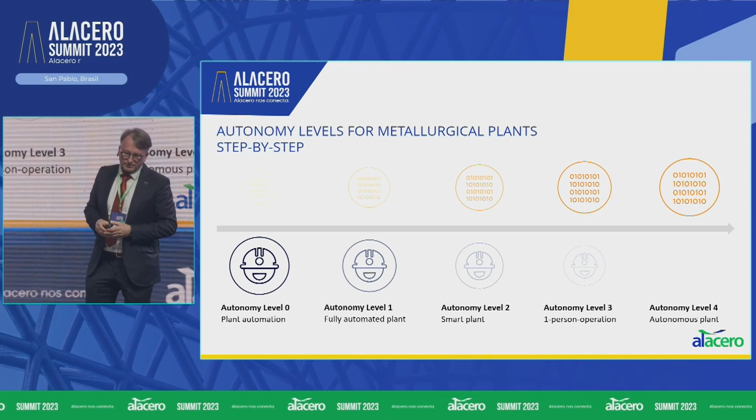That needs a lot of different technologies applied and different support systems. The central system, I will just show this one due to time restrictions, is a central operation cockpit we have developed. The idea here is not to present all the information to the operator, but to only present the information that is relevant to make the right decision, to prepare decisions that are just confirmed by the operator based on the data we get out of the plant,

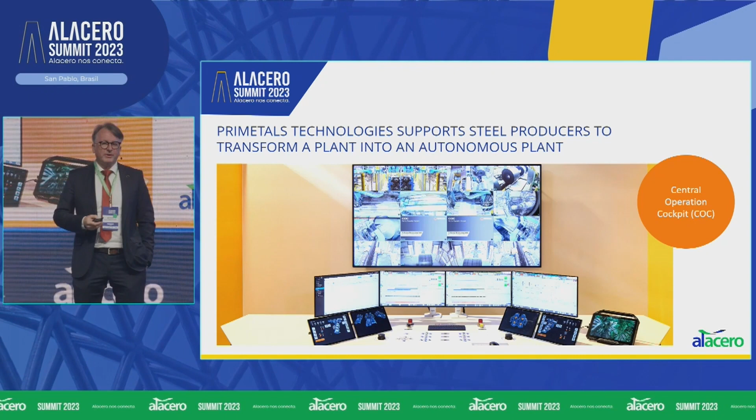and have a standard operation running actually without interference of the operator, and in specific cases where it is necessary, the operator gets the full support, gets all the relevant information, gets proposals what to do next. And with the support systems, one person can operate an entire plant. That is one aspect, plant autonomy and how we support people in making better decisions, making a better job.

The second one, CO2 reduction. Decarbonization: the ones who have been here last year maybe remember what my colleague Alexandre was talking about. We see that decarbonization will happen in 3 phases. In the first phase, it is more or less optimization of the existing assets and technologies. A transition phase, using partially hydrogen, using new technologies to reduce carbon with a potential of 30 to 40%. And then finally, green steel, maybe starting in 2030: hydrogen-based DRI plants, renewable energy, and carbon capture technologies will allow that.

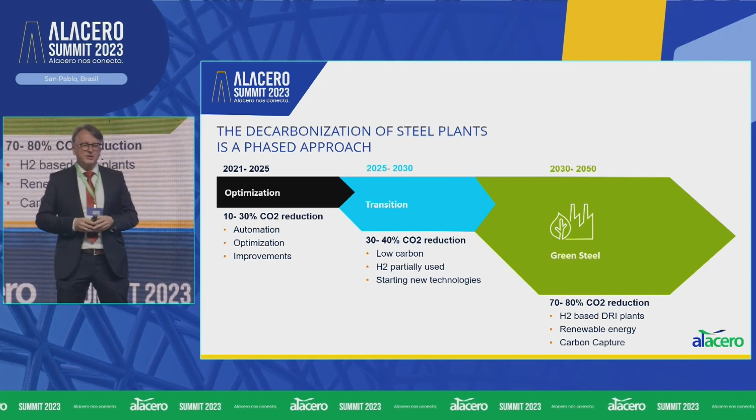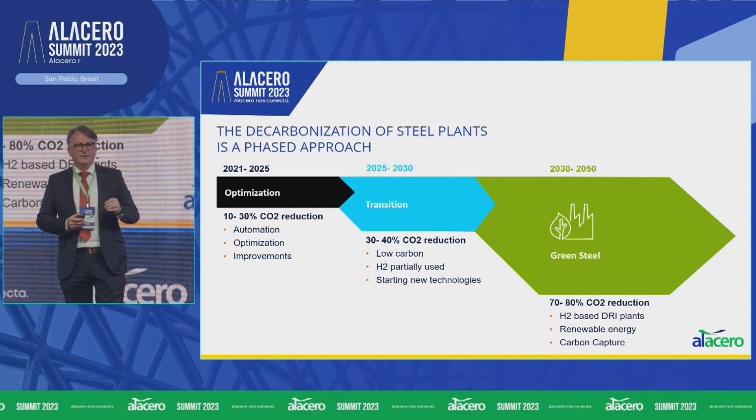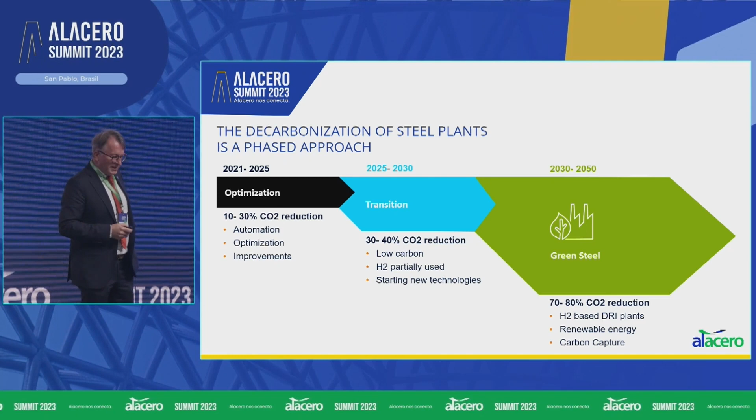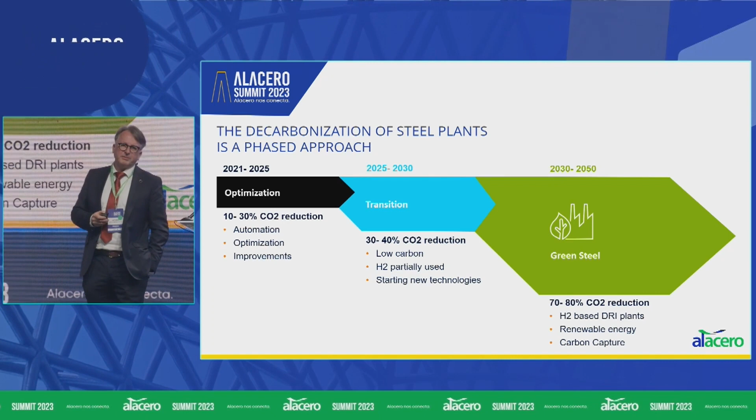I will only refer to the first phase and what automation and digital systems can do there, because I assume that in phase 2 and 3, the plants will be fully digitized anyhow. Automation and digitalization can support in many areas, and the beauty is that there is no large investment involved. Compared to installing a new technology, installing an optimization system is a rather low investment, and usually it's not only about CO2 reduction, there are additional benefits out of those systems that ensure a very short return on investment time. So where are the anchor points? Where can digitalization, where can automation support here?

One of the main factors I see is on the output side, increase the yield. Whatever you cut off and scrap in steel production, in the entire production chain, goes back to the beginning and needs to be remelted. All CO2 that is related to these pieces is wasted CO2. So increasing the yield automatically reduces the rate of carbon dioxide that is related to the sold and used product. That's a huge lever. On the input side, if it is acceptable by the process, we can maximize the use of friendly raw materials, which always needs automation support, process models that pre-calculate whether this is possible or not.

Minimize energy demand. It is very often very simple. When we talk about process, we always have in mind the blast furnace, the converter, the electric arc furnace. Very rarely we talk about water treatment plants. I still have it in my ears, my mom used to say, please turn off the lights when you leave the room. So when you go back to your plants, check if the cooling water pumps are turned off when they are not needed. It is so simple, and with minimum investment in turning the pumps off automatically when they are not needed, you can save a lot of energy, and energy always is related to CO2.

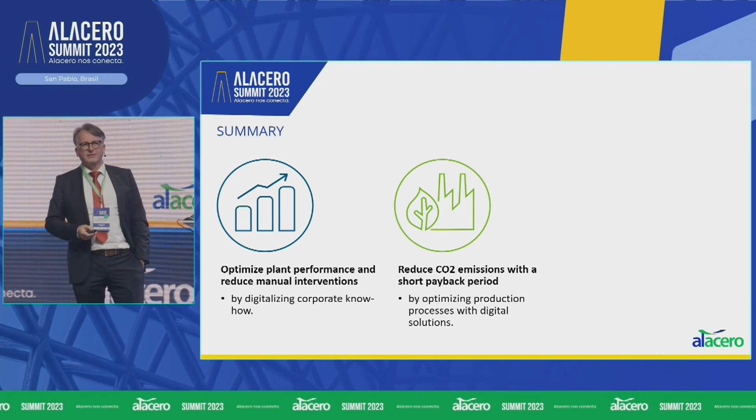To summarize, the digital solutions and the automation can support in optimizing plant performance and reduce manual interventions and increase the autonomy by combining data and information with digitized know-how that you can continuously grow. For CO2 emission reduction, the nice thing about the automation solutions is whatever you do, it pays back in a very short period of time, and it is not coming with a huge investment.

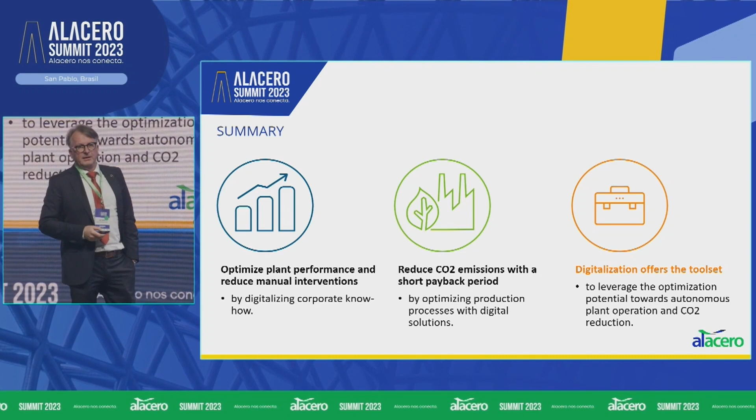Last not least, all the digital technologies that are available are just a tool set, and they only bring a benefit if they are applied properly, not only in the area of autonomous plant operation and CO2 reduction. Thank you very much. Thank you, Kurt.

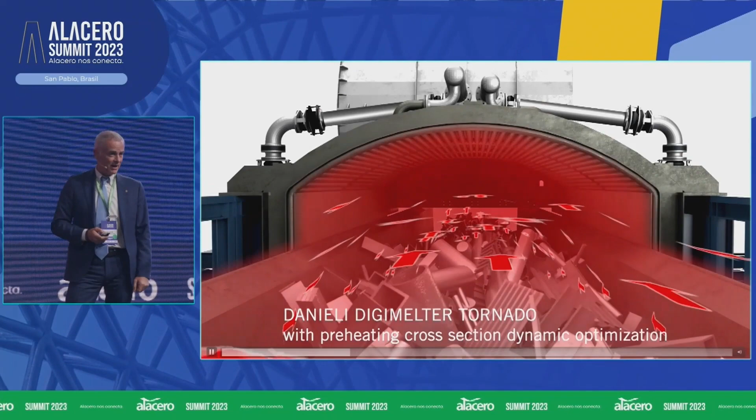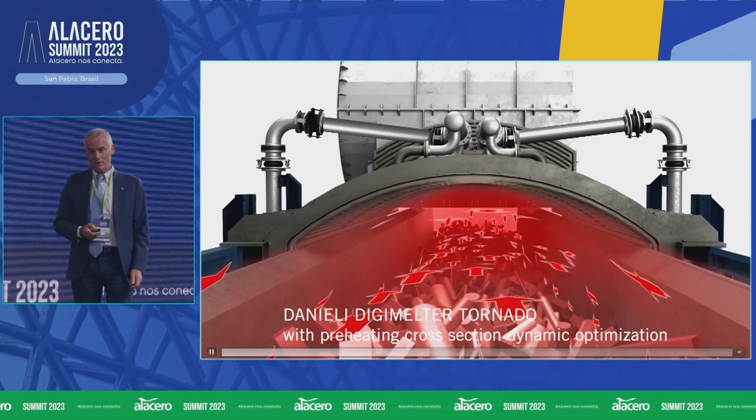Okay, this is the DANIELI Digimelter. Everybody knows what an electrical arc furnace is. This is the old solution, this is the new solution. What is new here is digital, so it's not analog anymore, it's digital. The electrodes are managed by the Q-ONE. I think more or less everybody knows about what Q-ONE is today, but it's a way to manage the arc from the electrodes in a digital manner. In some ways, it's like running a motor with frequency variation, let's say, for the speed.

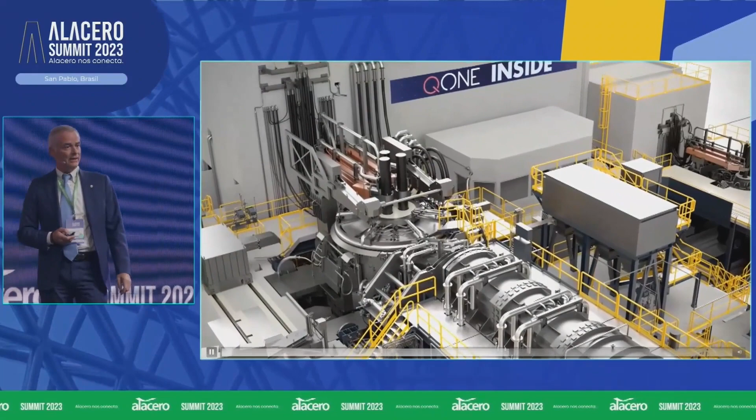This technology, we started to work on this around 2015. We did it in a plant close by our company, and we made this experiment. It was an experiment, we worked a couple of years on this small furnace. It was a very small furnace. Then we took it one step forward.

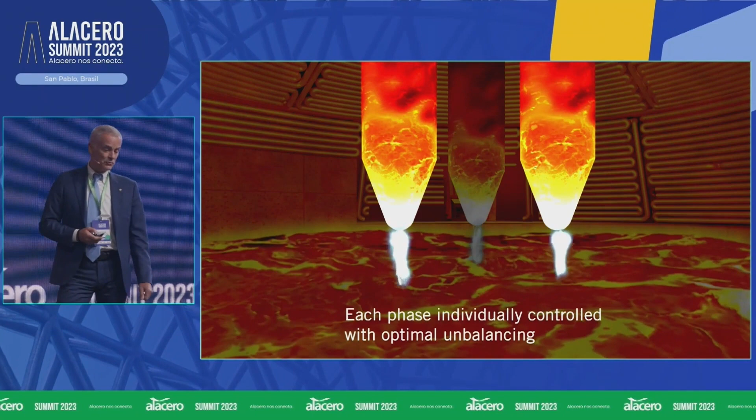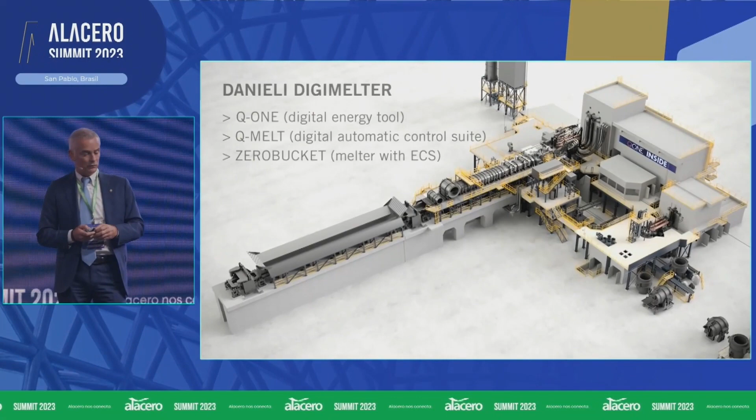Then in 2019, I was in Leoben, at another meeting similar to this one, and I was informing the people that 4 months later, we would have the first real plant in Sisak, Croatia, fed by the Q-ONE. This plant is a DANIELI plant, part of the group. We are producing steel there. And so in 2019, 2020 springtime, we had the first Q-ONE, the real one, in operation.

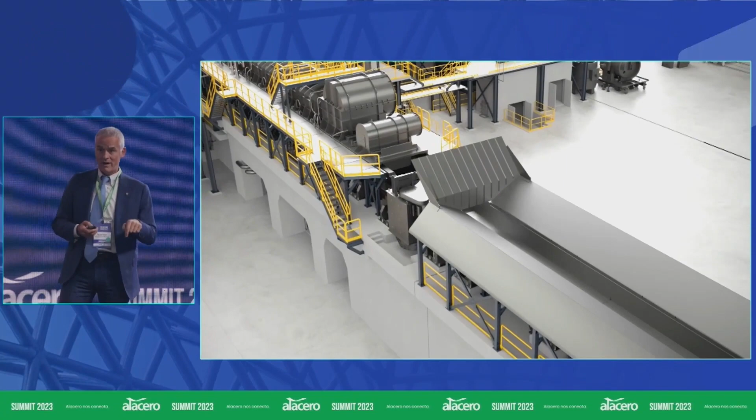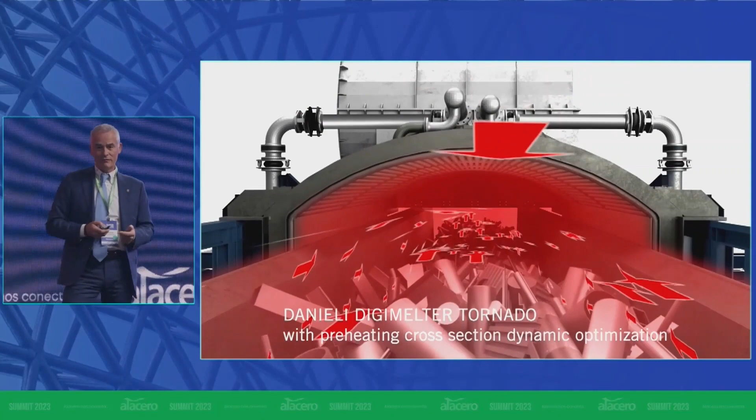Today we have 44 projects running. Running does not mean they are all in operation, but there are 8 in operation, and the rest is under design, under manufacturing, and so on. So in 4 years, we practically populated all the world, more or less, in different places, with this new solution.

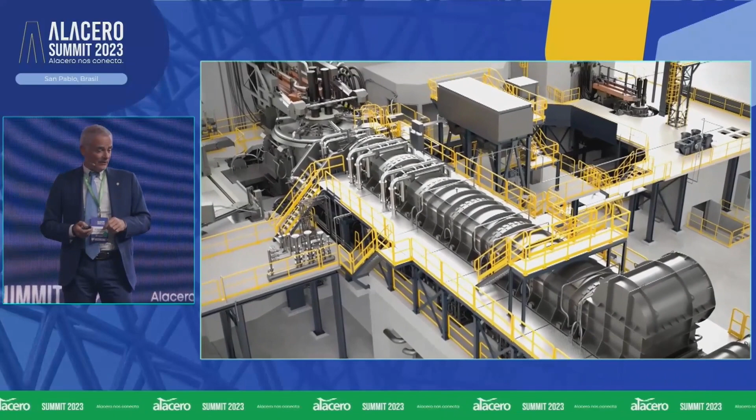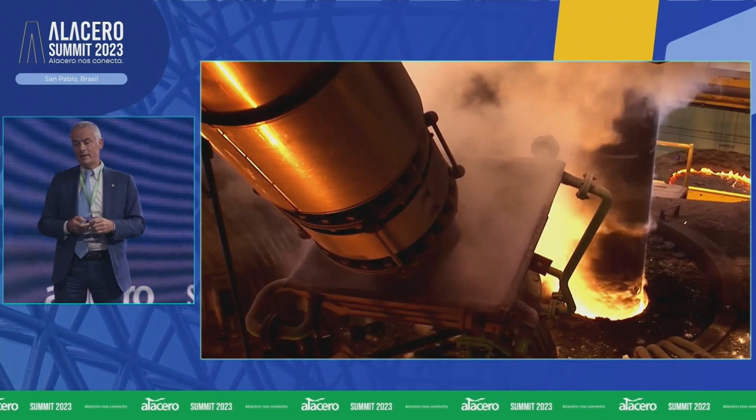Okay, the next point is the Energiron. Energiron is a process developed together with Tenova. It is a direct reduction plant. It is potentially the alternative to the blast furnace, BF-BOF solution. We are in the mainstream, let's say. We are producing steel using iron ore, and this solution has the benefit of reducing dramatically the emissions. This solution is also ready to switch to hydrogen instead of gas. Today it's with natural gas, the direct reduction is done with natural gas, but it can be used, we can also use hydrogen.

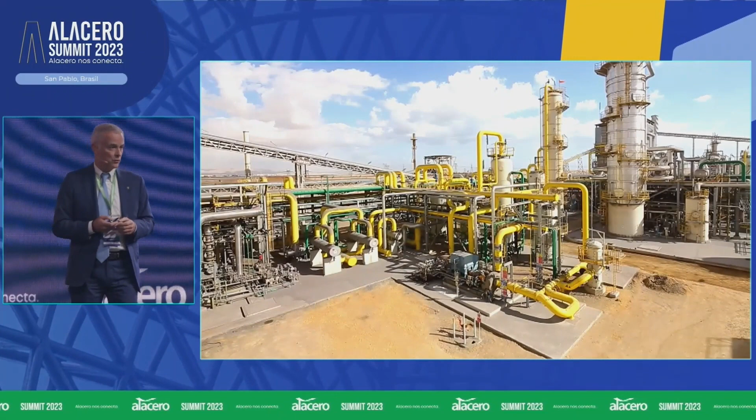There are already plants that are starting to think to use hydrogen. One is SSAB in Sweden, the name of the prototype is HYBRIT. There is another company there thinking to go in the same direction in Sweden. Why Sweden? Because Sweden has green electrical energy at low cost, and that is very important for this product, as it uses a lot of energy to produce hydrogen. So that solution is coming, let me put it this way.

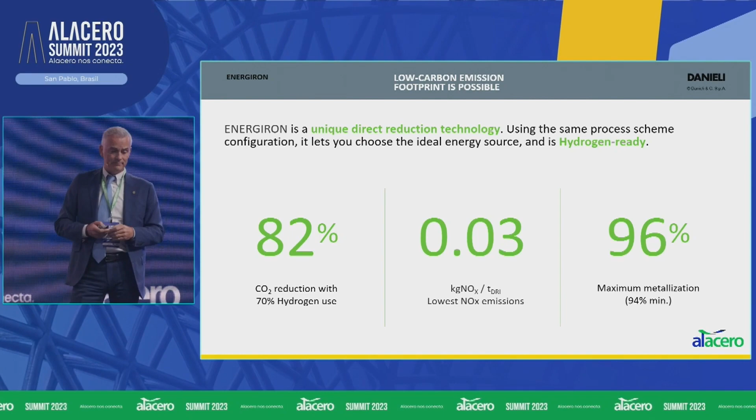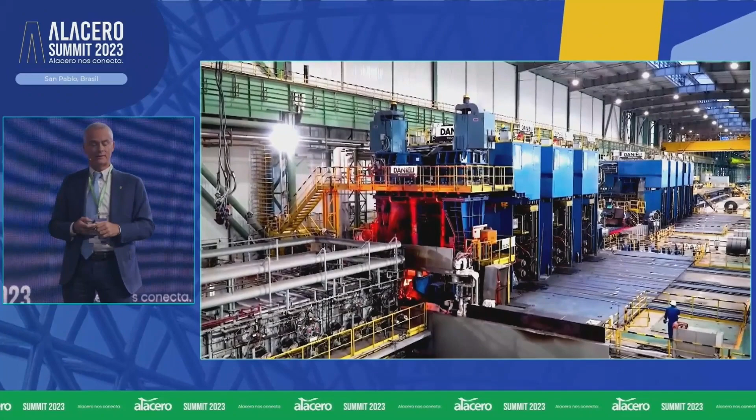Another technology we develop is the Danieli Universal Endless. Here we are in flat product, in the production of strip product. The first plant we developed with this technology is in China, Shougang Jingtang. This was 2019. Now we have another 4 plants under manufacturing and going to be supplied.

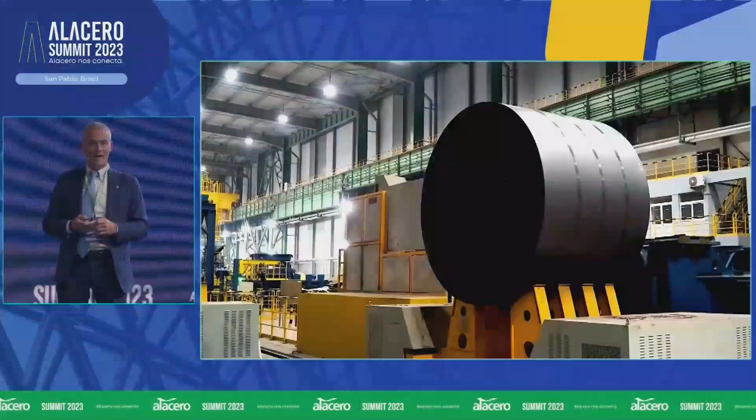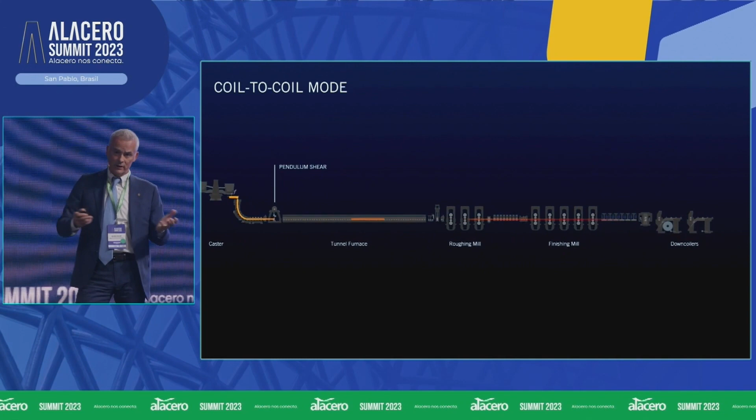The advantage of this solution is that we are able to be very flexible with this technology. For example, if you want to produce from 0.8 millimeters thickness to 25, this equipment is able to do it, while normally you need 2 mills. Why is it able? Because it's able to go coil-to-coil, semi-endless, or endless. This is the plus of the technology.

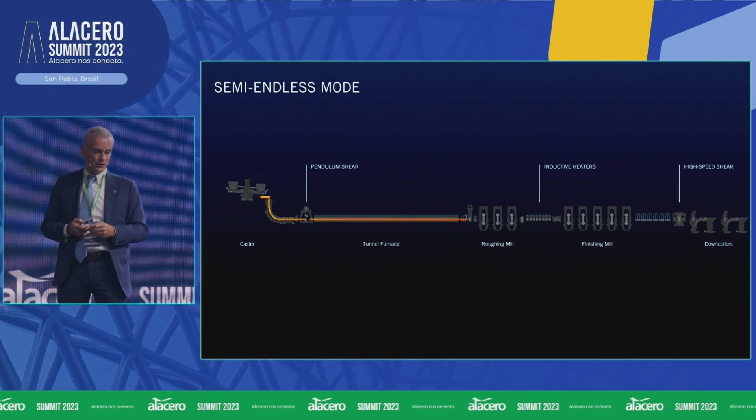The other point is that the casting is performing very well. So we are able to do up to 4 million tons per year of production, of output, while normally to do that you need 2 plants.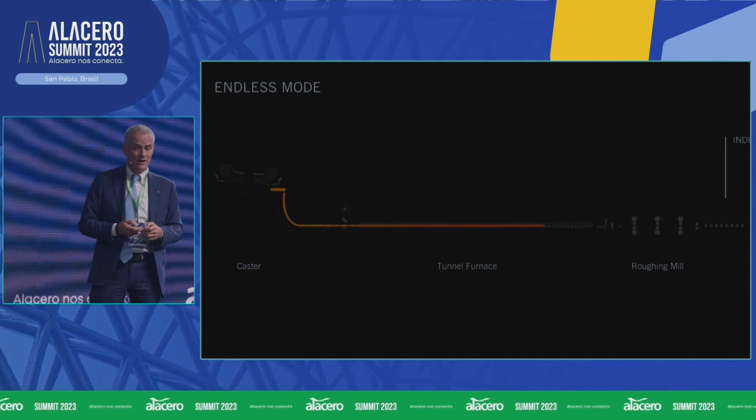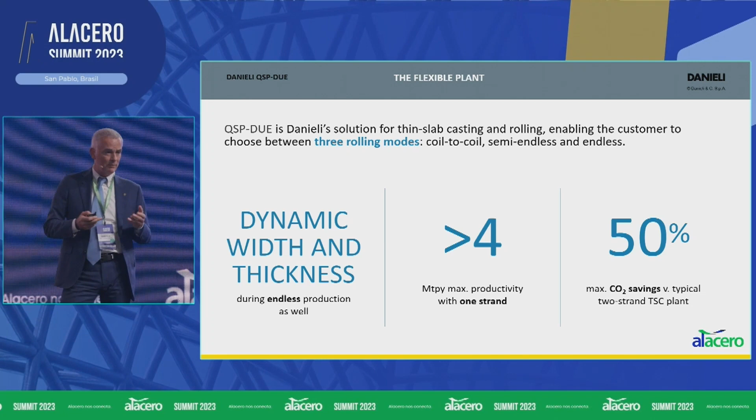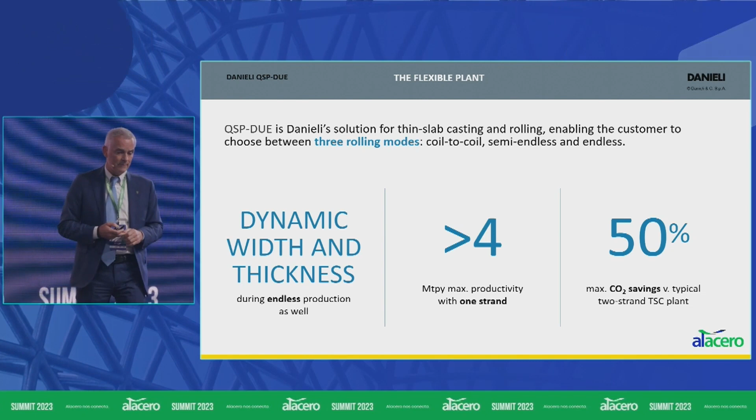What else? We can maybe see the summarizing table. Dynamic width and thickness adjustment, that is possible without stopping because we are endless, so we need to be able to do that to change production and so on. As I said, more than 4 million tons per year with one strand, with one plant. The saving of CO2 is about 50%, also considering that in some cases, for some product, for some application, we can avoid using the cold mill after this mill.

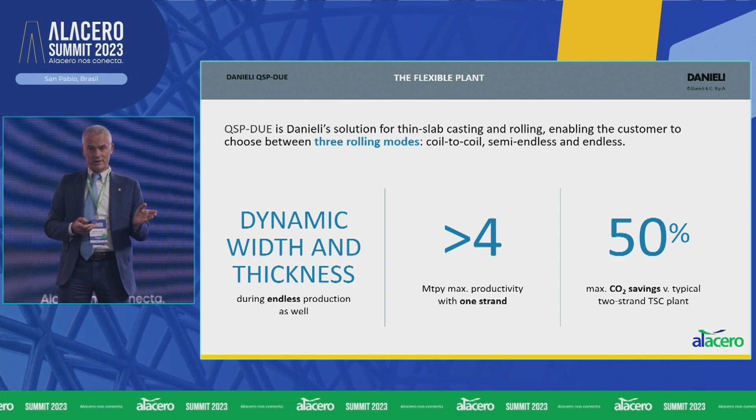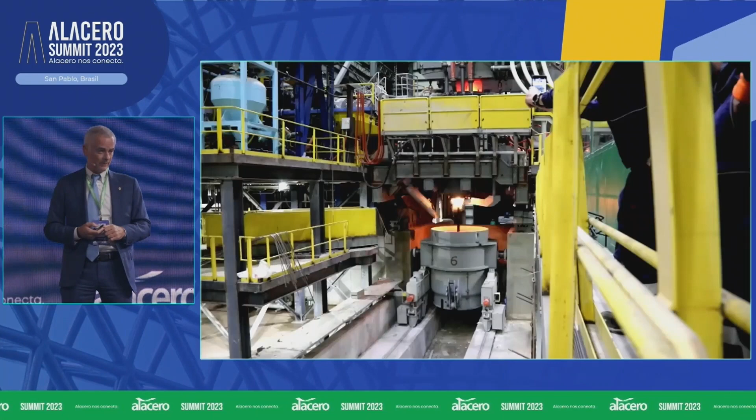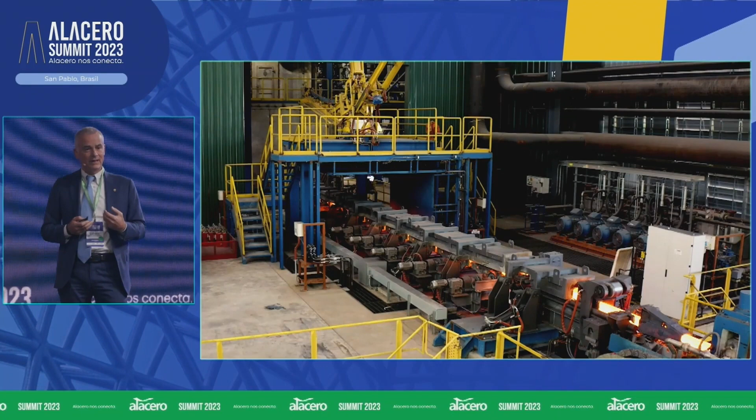We are always talking, as you see in all the presentations, about CO2 because, okay, in Europe, starting from Europe, everybody is thinking that we need to reduce CO2, so we are working on that. Reduction of CO2, anyhow, is for Danieli something that came free, let's say, because we started to think long time ago that we need to reduce the OPEX for the customer. Because the customer needs to be competitive, so maybe he will gain money and come back to buy the second mill or the second plant. So the reduction of OPEX is giving benefit to the customer, but also to the environment, because less resources means you are burning less material, handling less things, and so on.

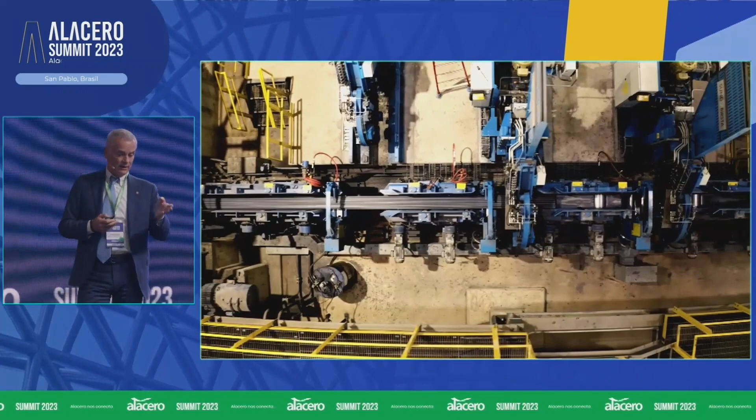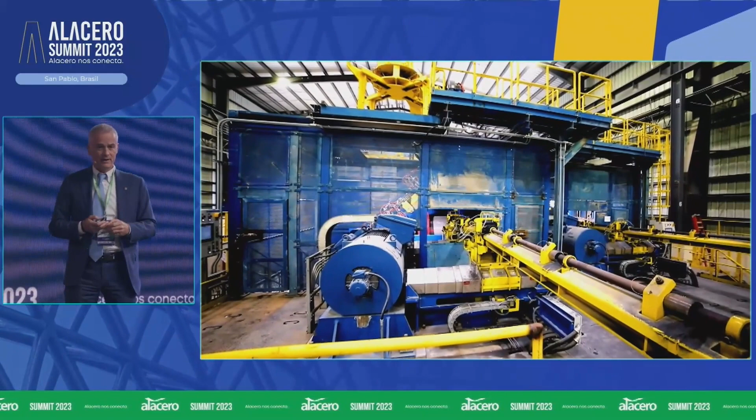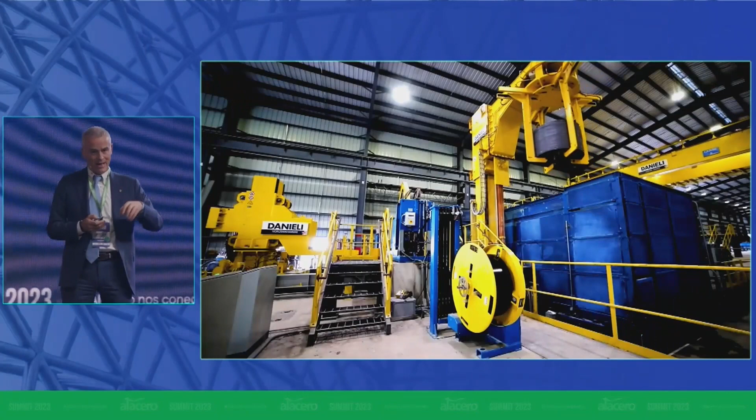This that you see on the screen is the MIDA, the mini mill Danieli for long product. Here is another story of success, sorry for repeating myself. 2008, we did the first plant in United States, CMC, Commercial Metals Company in the US. It was a challenge between the owner and our owner. At that time, they said, we need to make a small mill able to fulfill the production, the local production, collecting the scrap in the area and delivering final product in the area. The cost should be as minimum as possible, and the OPEX should be as low as possible.

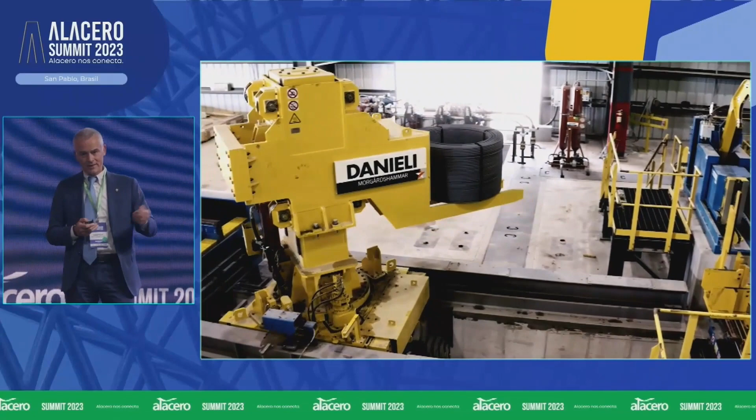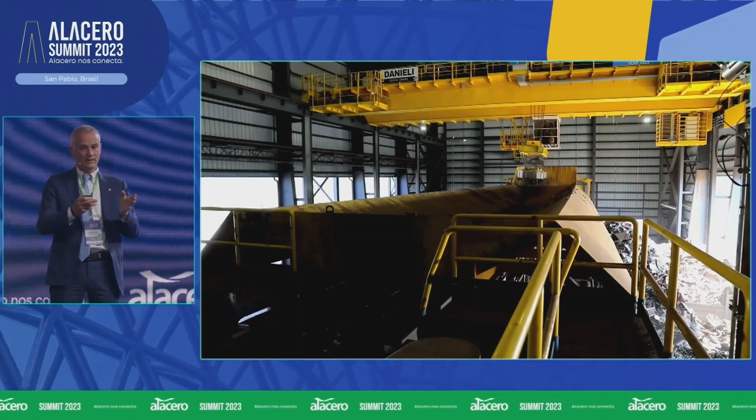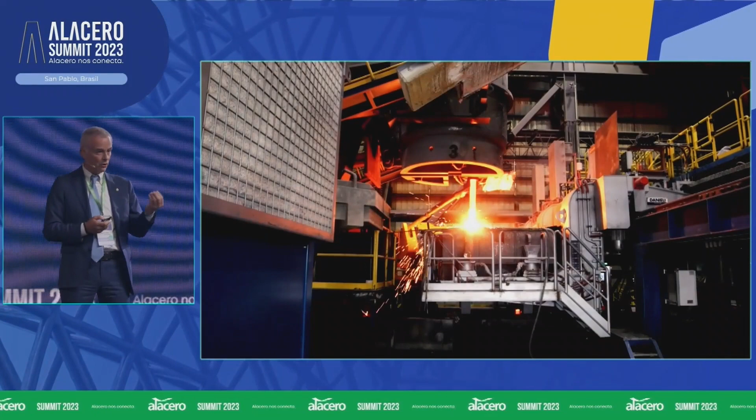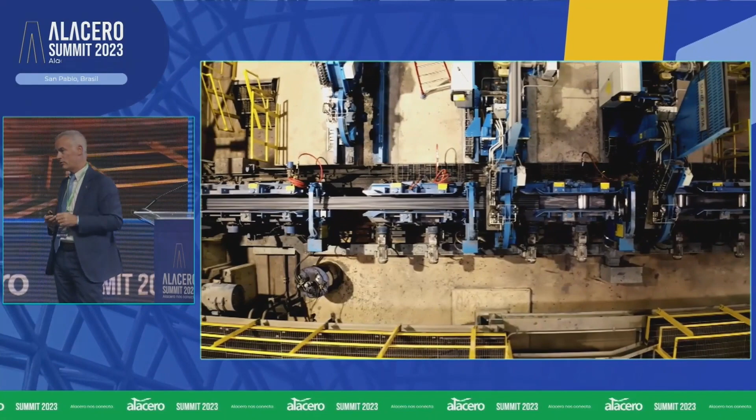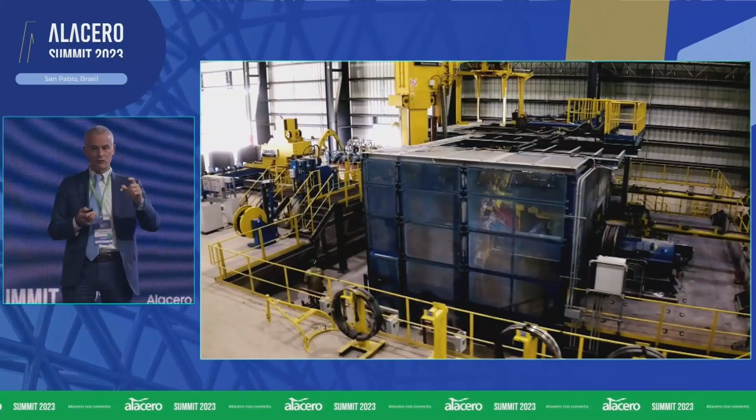There is another advantage, which is the fact that rolling continuously, endless, you can minimize the dimension of the wire rod, of the bar, or whatever. Because in the rebar world, let's say, it's possible to sell the bar within a certain range of tolerance dimension. So you can go to the very minimum one, so you use less liquid to produce more steel.

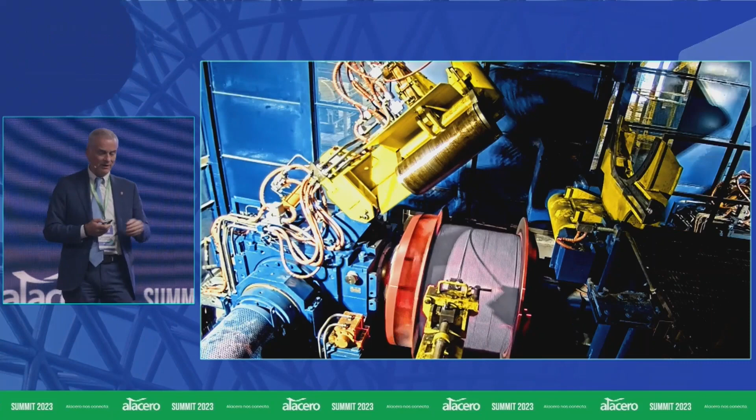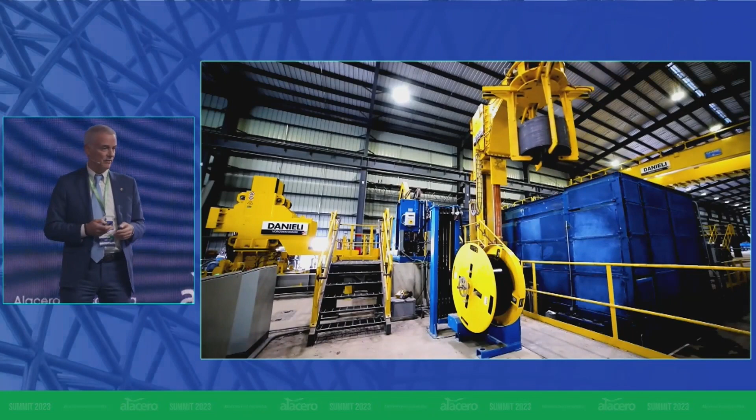And this is something that is giving a big advantage, another big advantage. One is saving the gas, the other one is being able to use better the steel, the liquid steel. And today we are able to do not just bars, that was the very first plan, but we're able to do spooler lines and wire rod lines.

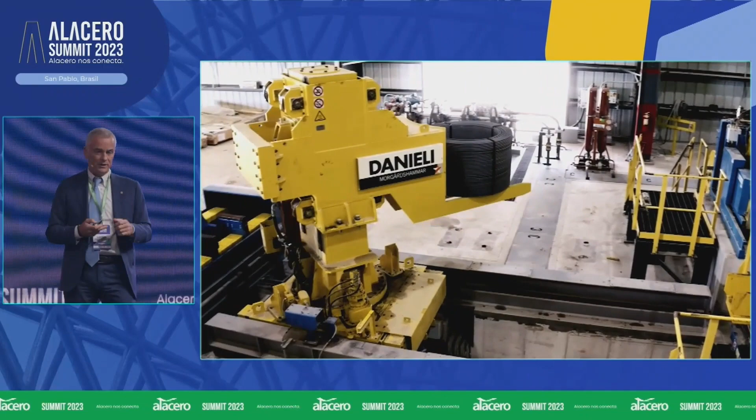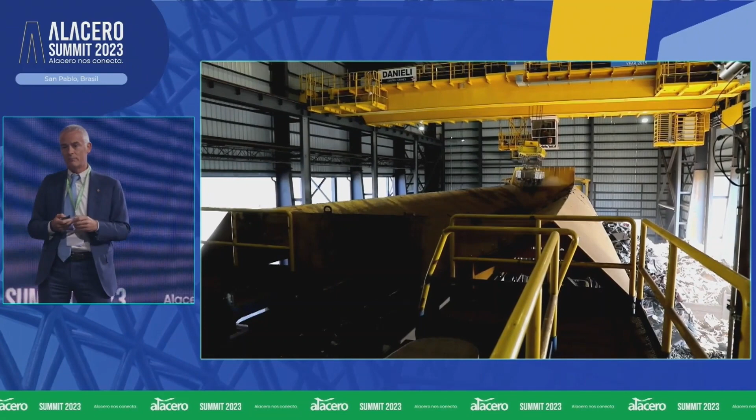In these weeks, we are commissioning another plant, again with CMC in Arizona, that will go for merchant bar. So this is another step, because rebar is common, let's say, to work one day with the same product, same dimension. But when you go to merchant bar, the changes are frequent. So, changes are frequent, you need to stop the casting, because you have to change many stands. And this is the other challenge that we have now on the table.

Summarizing, the speed of the casting is a key point, because we are in endless, so we have only one strand. We are now running close to 10 meters per minute with the casting, while the common speed for this kind of steel is less than 6, 5.5, 5. The very first plant started with 6. And then we improved the same plant, and you can understand that the production has been increased by about 50%.

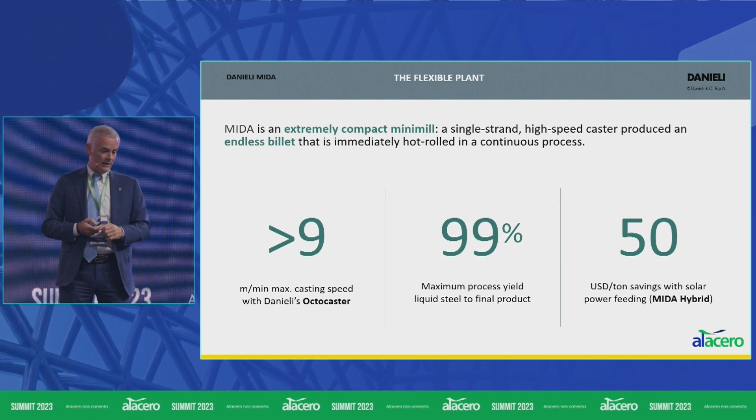So 200,000 tons per year at the beginning, and now they do more than 300,000. The yield is so high compared to the normal 94, 95, 96, because of a very good management of the mill. There is no cut, no head and tail cut. There are less cobbles, because the bar is a continuous bar. There are no heads entering the next mill, and so on.

And at the end, which is all the blah blah, but at the very end, the number that you see here on the right side is what makes the difference. We can save 50 USD per ton. So this means that in a transformation cost that is probably less than 300, 250, you save 50.

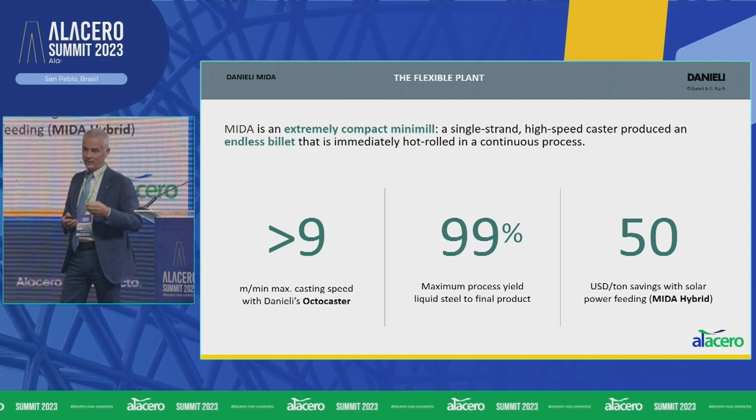And this is the reason why today in the United States, the way to do rebar is this. In Europe, we are stepping a little bit, not so fast, let's say, but we have 4 plants potentially, 4 orders that are hot, as we say. In India, we installed the first one. We got the first order with Tata Steel. Tata Steel is recognized in India, so we expect that many other producers will come for this technology.

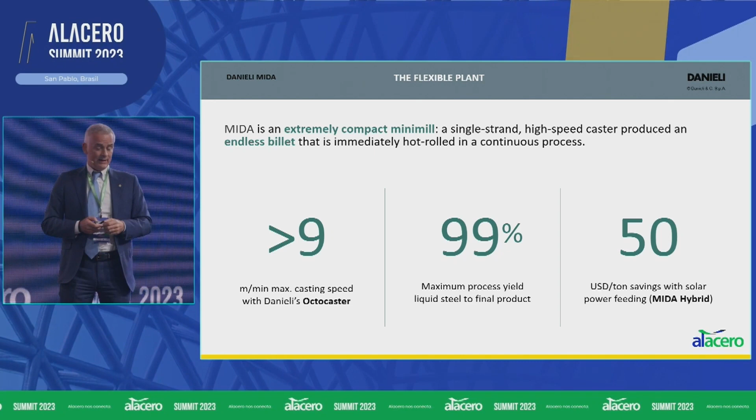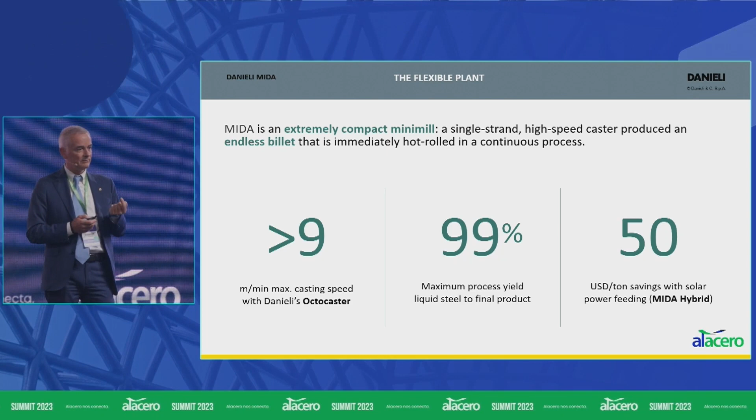Numbers: in 2008, we started to develop this technology. 8 years, nothing happened. Okay, so one plant running, no other customer was trying to follow this idea. Then the same customer did the second plant. After that, it was a booming, of course, a booming of plants. So 2008, the first one, 2016, the second one, today, 25.

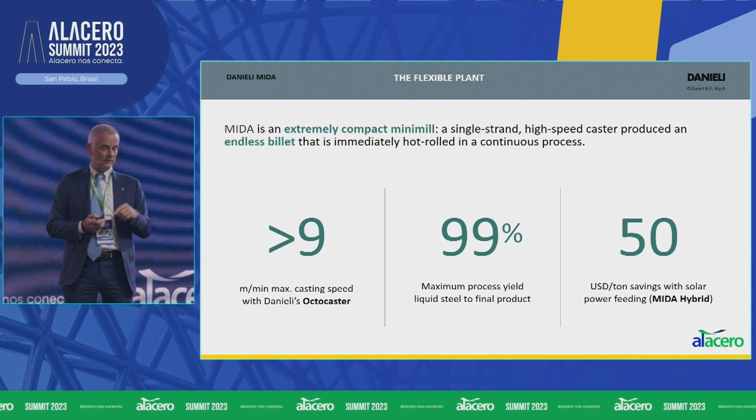That's it. What's next? We think that next, well, my colleagues already spoke about this, and I think Russula, if I understand well, will go deeply into this, the concept of digitalization. So, of course, what I presented before is change of process, important changes, not just optimizations. But probably the next step will not be so easy to change again the process. So we think we trust a lot in the digitalization, artificial intelligence, and so on.

These are the packages that we have practically available, not all ready for the market, about artificial intelligence. One of the most interesting, I think, is mechanical properties prediction, which is a system that is able to tell you if you will reach that mechanical property with your coil, for example, by putting into the computer, into the system, all the chemical composition, all the reduction in the stands, temperature in the various steps, and so on. This one is on the market, we can sell it. The advantage for all this is what? That you can increase quality, you can reduce the loss of material, second quality, and so on.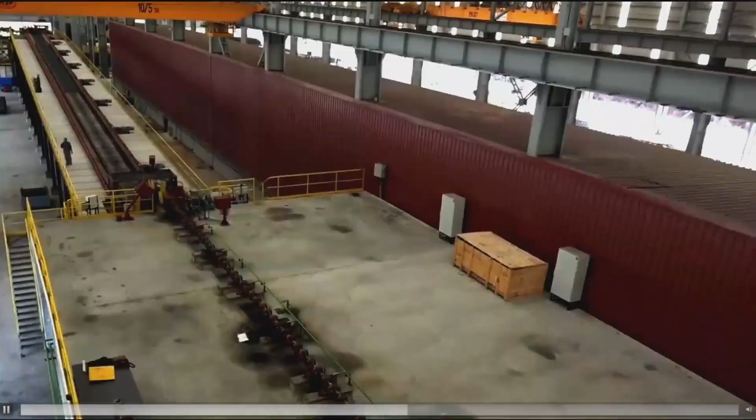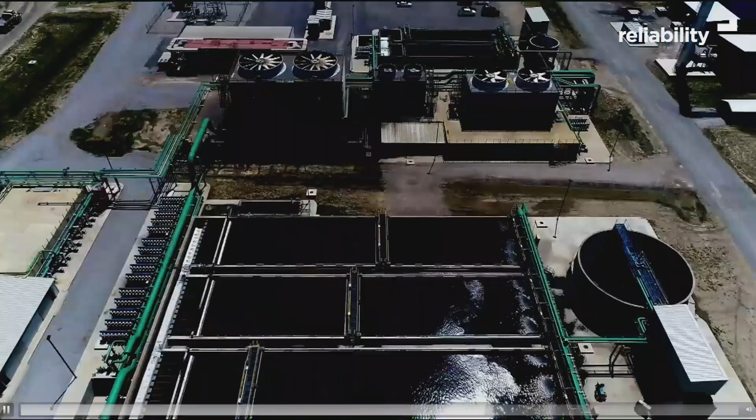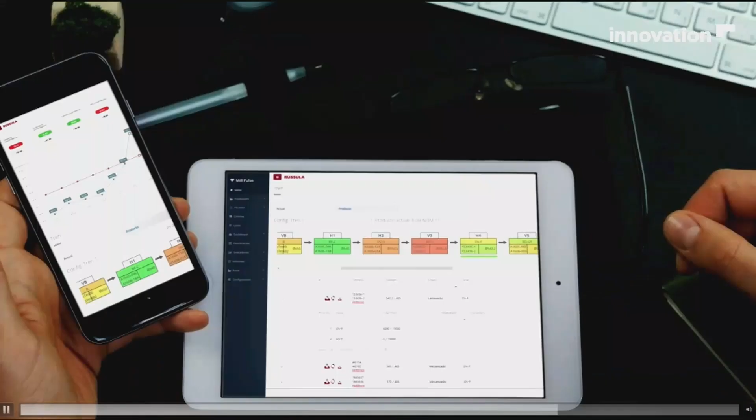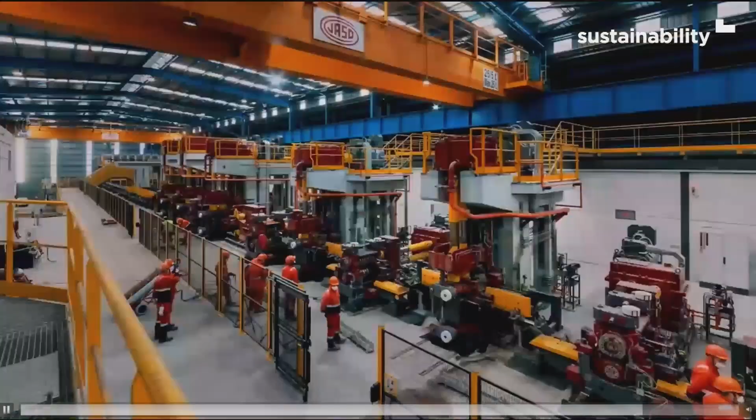Artificial intelligence, non-fossil fuels. The future is today. After 35 years, we're at the forefront of the steel industry. How do we do it? By knowing where we're heading. Excellence, reliability, innovation, sustainability are the four core values that guide us. We strive for excellence. We prioritize reliability. We embrace innovation. And we're committed to sustainability. We know what the future will be like because we're already there.

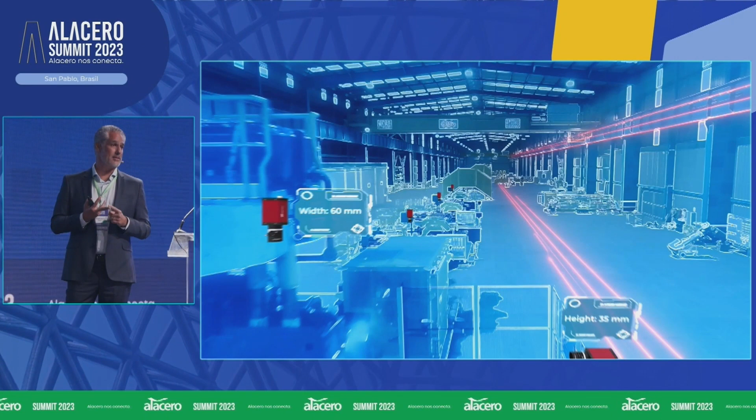Also associated with artificial intelligence, I can forecast actions on the process based on behavior patterns. For example, in the application of artificial vision, cameras positioned in the mill at certain positions allow me to get a digitized image as if it were a scanner of that bar. I can see the form of the material, dimensions, traction, stability, angle—anyone who works with rolling knows what I'm talking about.

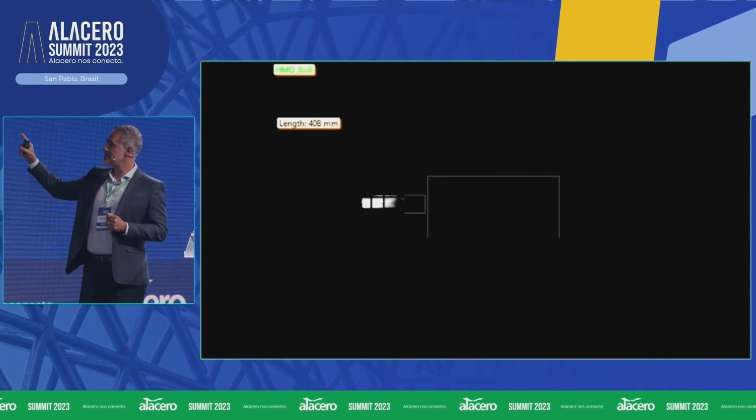Another interesting point for the application of the artificial vision solution is at the beginning. Every time I laminate a bar, there is some metal loss. If I have the digitalized bar allowing me to measure exactly where I cut that bar, I can inform the automation system that it made a mistake and reduce this loss. Thinking about cutting this more than 1,000 times a day in a year, that might mean hundreds of tons a year.

This is an example of planning technology resulting in efficiency. Like a Formula 1 car, the mill has to stop. You need to change equipment when you change the product being milled. We change the cylinder, the machine setup.

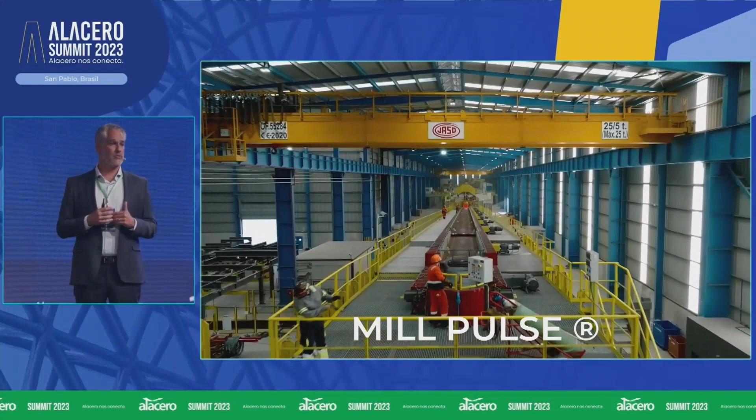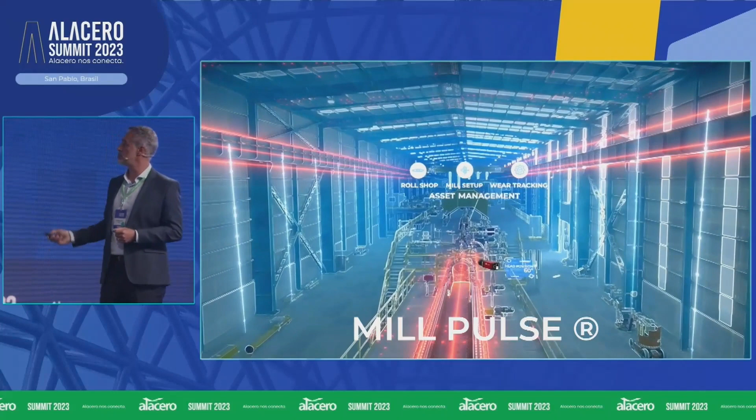A solution developed with the main steel producers in Europe, we developed a system called Mill Pulse, which manages the complete production process of a mill, from end to end. All the process, cylinder workshop, furnaces, laminators, are all digitized and processed within one single database. Instructions and good indications are passed on to the production manager to make the best decisions, keeping the mill idle as little as possible, resulting in efficiency in the process.

For sustainability, the fourth concept, we know that the steel industry is by its nature a recycling industry, but it uses a lot of water, and it's a very scarce resource, especially in Latin American countries. The solutions applied to water treatment plants aim at reducing the consumption of this resource and reusing it several times within the process, with the goal of sometimes zero waste or ensuring quality of the final effluent that is sent to the environment.

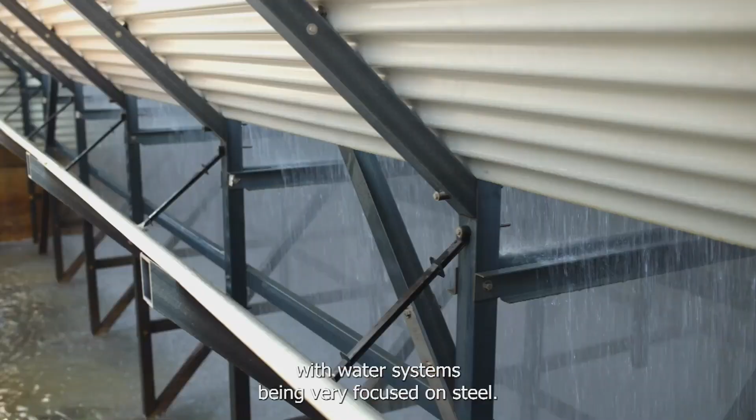This is an example of a project developed by RUSSULA and BlueScope Steel in Alacero. In collaborating with us and not just delivering a standardized solution, we're very impressed with RUSSULA's technical expertise with water systems, being very focused on steel. From the time we awarded the initial contract, we executed that project in a 12-month window. That's a phenomenal result in a very short amount of time.

Other sustainable solutions are becoming a reality within the steel industry, such as the use of gray waters from cities or from other productive equipment that is treated and used within the steel industry.

On the side of decarbonization, what we're talking about a lot here, RUSSULA has been working on a pioneer project in Europe and Spain: the construction of a rolling mill that is 100% sustainable without emission of CO2, with sustainable and photovoltaic energy, both green hydrogen and wind power. We start operating in 2026 with a capacity of 1.5 million tons, possibly being increased to 2.6 million tons.

Besides investing in technology and innovation, we play an important role in social responsibility. In a joint initiative with the Brazil Gerdau Group, part of the income of the projects within the group is reverted to social actions in local communities around the mills.

As you know, we are taking big strides towards an industry that is increasingly more autonomous, efficient, safe, and sustainable. Thank you very much.